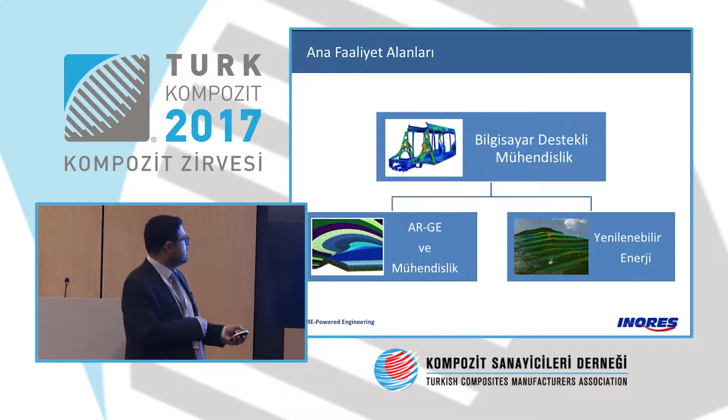As an engineering solution provider, we are providing services and solutions for our customers. When we look at them in clusters, in the very first core phase, we are giving verification services for the designs, and performance and weight optimization services is the second. And on the third side, we have information, knowledge and risk analysis, and we give consultancy services. We also have some foreign partners within this field.

And from concept to prototype, we develop products. Generally, a metal piece is redesigned with a composite approach, and we are also producing the prototype for this product. And serial production, robotic production systems, and quality equipment integration is the most experienced field that we are involved in.

Enforcing your automation systems, integrating robotic systems to increase quality. We have some integrated systems with which we provide high quality. We have some solution partners. We are not providing all of the solutions by ourselves, but we are working with the right partners. I will be speaking about our partners later on.

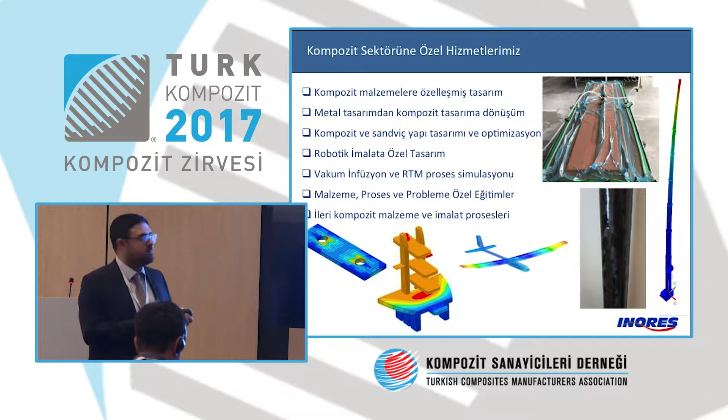When we look at composite materials, we provide a tailor-made design. Transforming a metal design into a composite sometimes does not give an advantage. Also transformation from metal to composite designs, sandwich design and optimization, and robotic manufacturing designs, because there is a specific interrelated approach within this field. When you produce a material with a normal technology, you have some limitations, and with robotic technologies, you also have some limitations. When you are doing the design, you need to do it in accordance with the capability of the device.

And vacuum infusion and RTM process simulations and training programs, and also further advanced trainings for problem solving and materials and processes. We have some advanced composite material and manufacturing processes trainings.

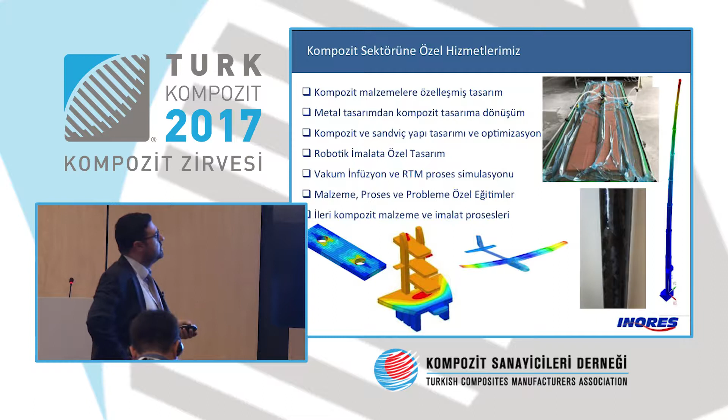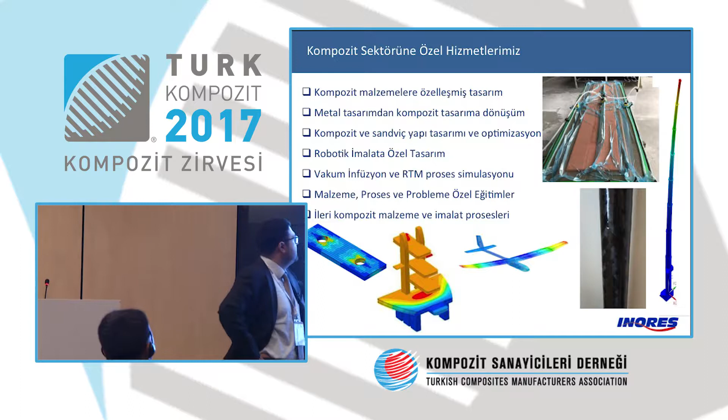You see a mast structure on the very right side and steel flooring. It is going from 1 meter to 8 meters. We have a filament line. It's a composite pipe structure, a cylindrical profile, carbon epoxy material. This is a drone material. And for thick composites, delamination simulations and analysis can be seen as some examples.

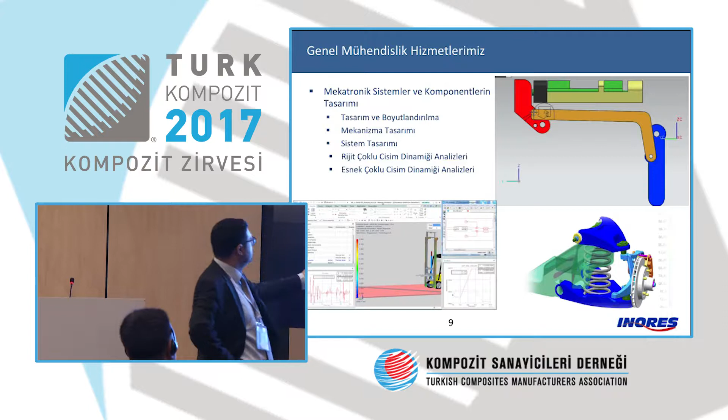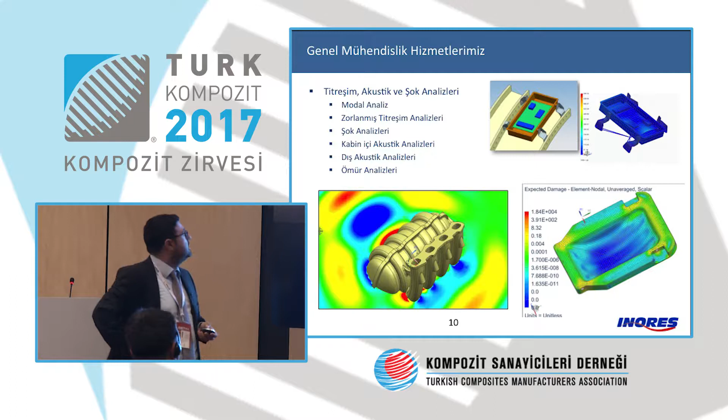Other than composite services, we are providing mechatronic systems and component designs. As you see on the right side, this is a triggering mechanism and a suspension mechanism below, and this is a mechatronic simulation. Other than those, we also have acoustic analysis for vibration. We have different software that we use for analysis, design and optimization solutions.

Of course, specifically for composites, the process to develop a tailor-made product changes from design to design. When you are designing with a metal piece, the criteria for optimization and the damage criteria are changing. So analyzing a very complex structure asks for different methodologies, different approaches. In the first step, we need to have the performance criteria. You need to cope with the performance criteria in order to decrease the weight. When you set a target, achieving that target is not that easy.

In carbon composite structures, it is possible to decrease the weight by 80%. However, in the past, in the spacecraft and automotive sectors, they could not achieve this 80%. They achieved 50%, 40% weight saving. So that is not so feasible. And sometimes you are not able to get the product that you want at the right time and the right place. The basic factor for this is matching composites and metals one-to-one.

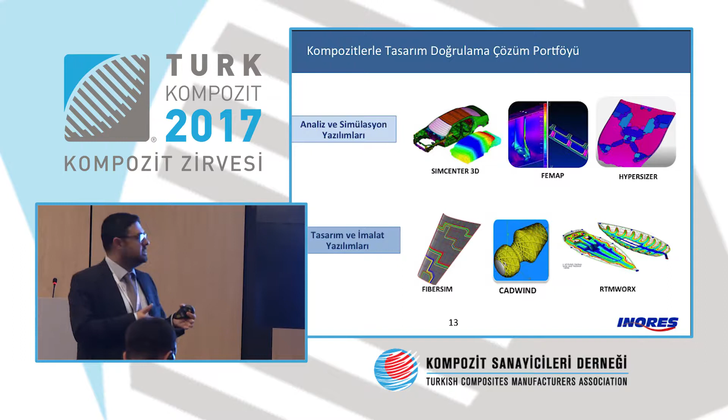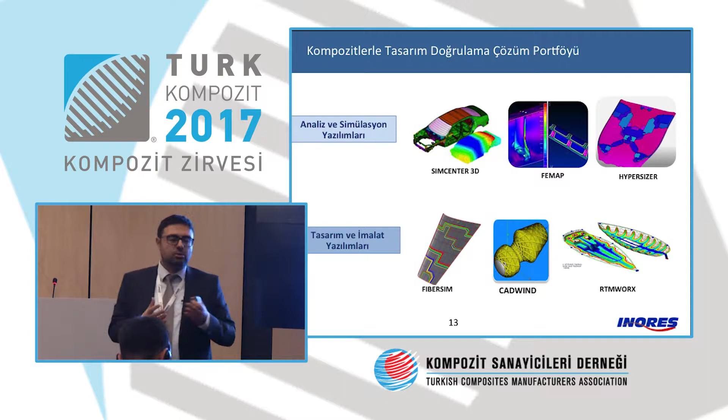For the infusion or RTM processes, resin is kept in a closed spot or covered with a vacuum pack, and when you flow it at a certain place, the resin ports or the vacuum ports and infusion ports need to be placed. Otherwise, you may have some problems. You may have some dry areas, dry zones, and you may have, for example, fluctuation and waving on the structure. So it is possible to create a design with this technology for the fluid resins.

Siemens Simcenter 3D technology is an analysis, simulation and optimization opportunity for us. You see structural, dynamic and durability, composite, acoustics, motion, flow and thermal disciplines are being examined. Multiphysics is the interdisciplinary approach which it is providing you. Thermomechanical analysis can be an example for this.

With the thermal impact, you are checking the deformation of the structure, and if there is a fluid structure, what is the interaction with the deformation? Since the flow geometry is changing, the quality of the flow is changing, so different disciplines can be analyzed by making use of this technology.

There is a composite mixed material that we use in the automotive industry. The automotive industry is really working very hard on composites. In the development phase of the composites, and when we look at the manufacturing process, there is a huge difference.

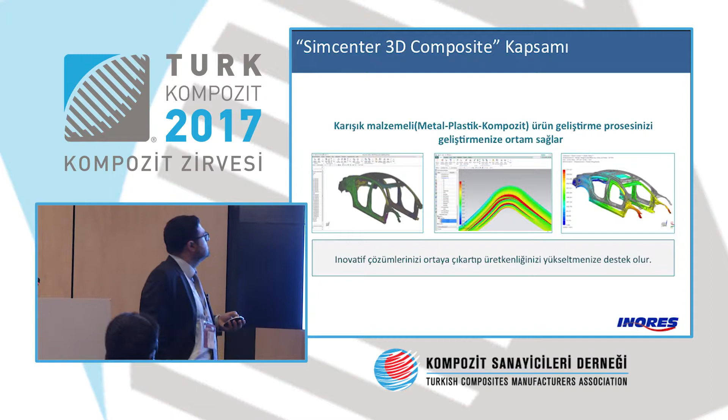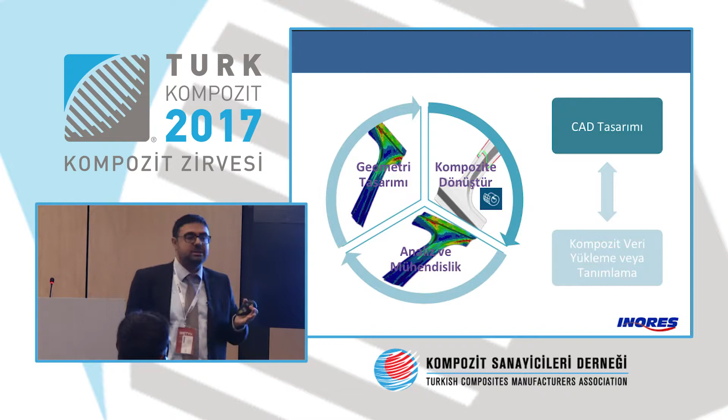Siemens is not only looking at this issue from the composite side, it is also looking at it in a more comprehensive way and looking at the mixed material designs. CAD design is starting from the geometrical design and then transforming it to the composite design. The present CAD designs, in the past, were only working for geometrical design and also on the engineering side, but now they are producing the interfaces, and they do have composite-specific FiberSIM type of software.

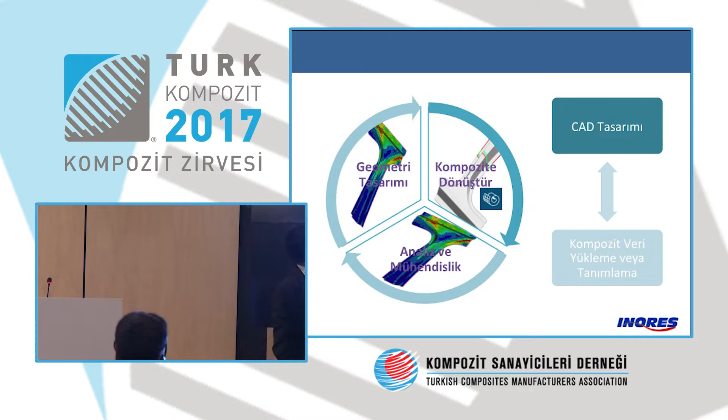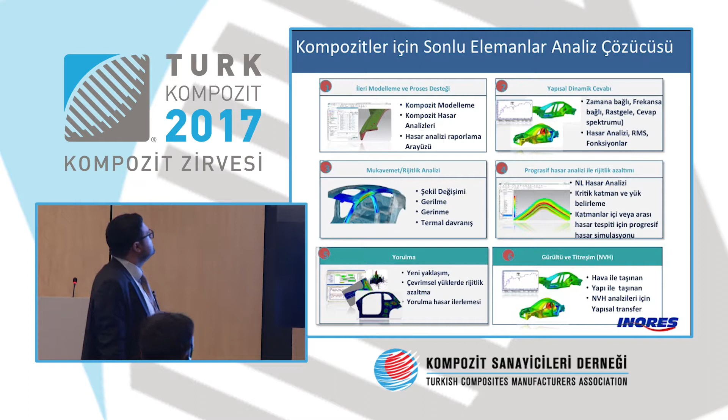It's a cycle, actually. After doing the composite design, you need to do the analytics of this, you need to have the engineering studies, and you need to optimize this design. So it's a cycle which needs to be revolved. And when we look at the analysis of the finite elements, we do have some solutions. The modeling of the composites and their coiling process for the finite element analysis is very crucial.

According to the geometry of the fabric, the orientation is changing, as you all know very well. Composites do have a strength according to, of course, the placement of the fabric. When we look at, for example, linear tensile strength, with the right orientation it is possible to bring more strength and more resistance.

And when we are calculating the orientation, the manufacturing orientation will be different. So during the manufacturing you need to analyze it, and after that, during the using time, you need to analyze it. And when we look at the analyzing situation, you're looking at the structural analysis, and also durability strength analysis, and also vibro analysis, and RMS functions can also be taken as a result of these analyses. In the aviation industry, there is a progressive damage analysis.

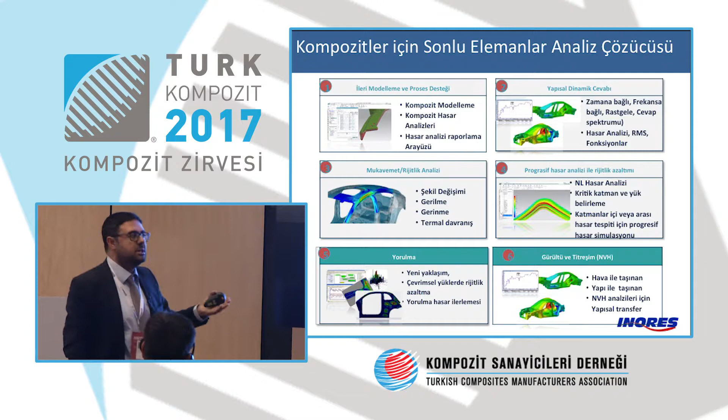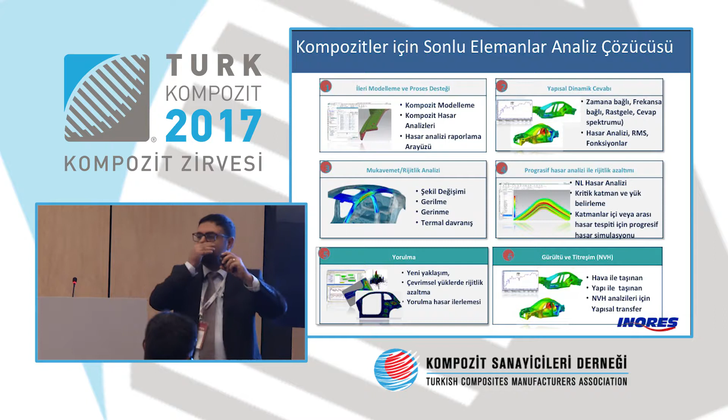And for the composites, you do have some analyses for fatigue range, and Siemens does have some studies about the fatigue range. For the layered composites, with small strikes, with small beads, you can have some cracks inside it. And when the structure is operating, it is causing delamination.

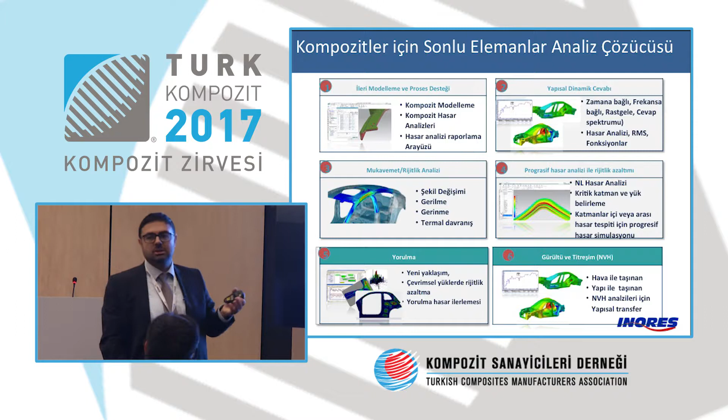Another important topic in the automotive industry is noise and vibration. In the automotive business, on the metal structure, by making use of extra materials, it is possible to decrease the impact of noise. But composite structures do have some additives, and when you create some layers within the structure, without adding any isolation material, it is possible to decrease the level of vibration. And it is bringing you a better advantage when you compare it with metal structures, and it is more cost-effective.

I have spoken about FEMAP. For the finite elements, it is a modern modeling interface, and it's a very cost-effective solution. Different complex or simple structures are being analyzed, and composite-specific types of results are being taken from this interface.

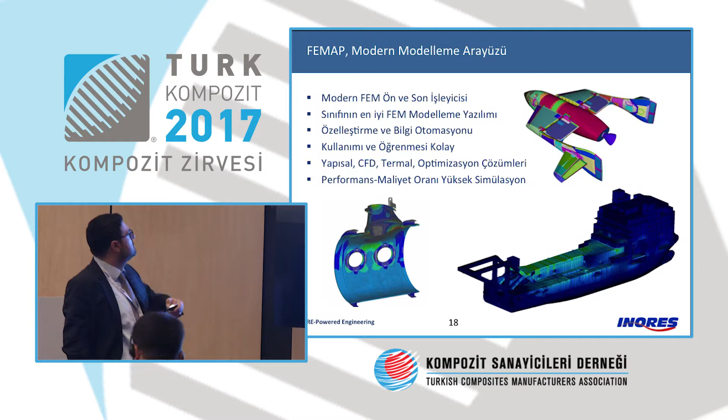The ply module, for example, is observing the orientation changes during the operation, and for the sandwich structures, there are some stability calculations, and it is possible to check whether there is any damage or not. So it's a very cost-effective solution also.

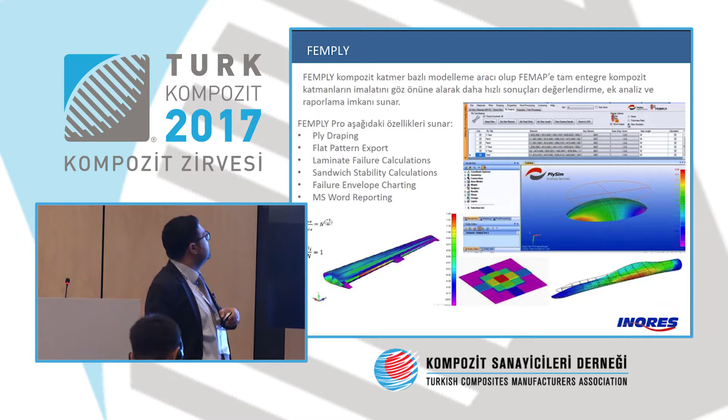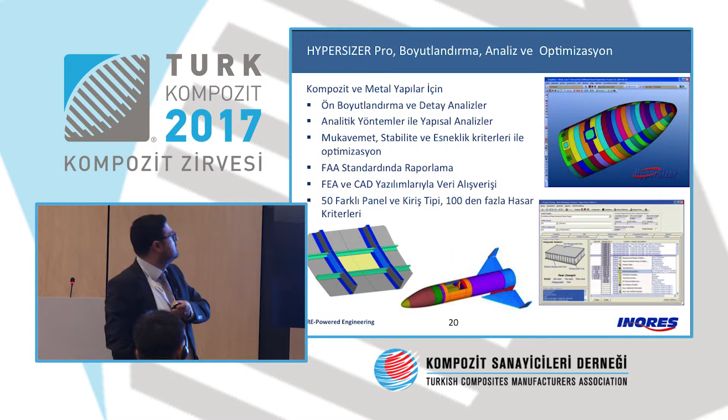HyperSizer software was developed by NASA in the 1990s, and it was spun off from NASA, and they developed this software later on. For complex spacecraft and rockets and also wind turbines, it is taking pieces and, panel by panel, it is resizing your structure, and with more than 100 analyses, it is possible to carry out a damage report. In the past there were some industrial studies, and when you compare it with conventional methodologies, it brings you a better weight advantage.

When the structures are becoming complex, buckling is becoming very critical. Buckling is a type of damage which occurs. If the material is capable of carrying the weight, and a stress occurs below that, you're having a buckling stress, and you are having a type of collapse.

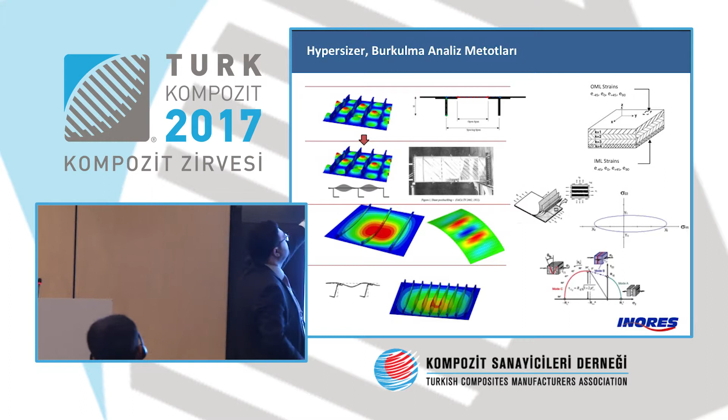And post-buckling is another behavior which occurs in aviation-based structures. Maybe you can see it in the planes. The outside layer is a very thin aluminum, and it is causing some post-buckling effect. Post-buckling is temporary. The thin layer, as you can see, is having a temporary buckling, but the composite structures are becoming thinner, and buckling is becoming very critical for composite structures. And HyperSizer is analytically calculating that.

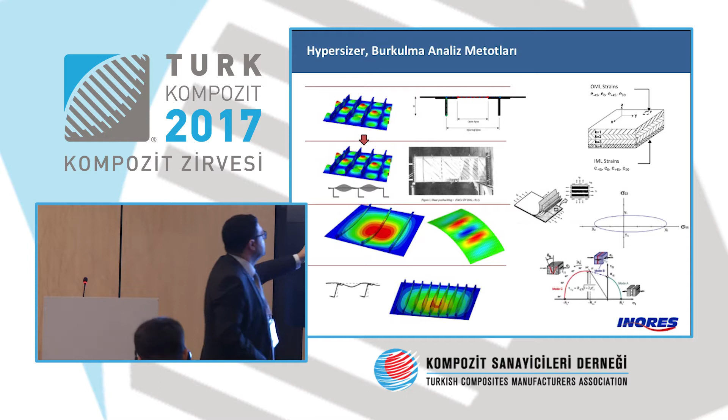And for finite element, it is possible to provide a solution for the buckling analysis. In the linear approach, buckling is observed globally, but it is not possible to analyze it locally. So you need to create another layer to observe the local behaviors, and you can get the local behaviors with the help of this software.

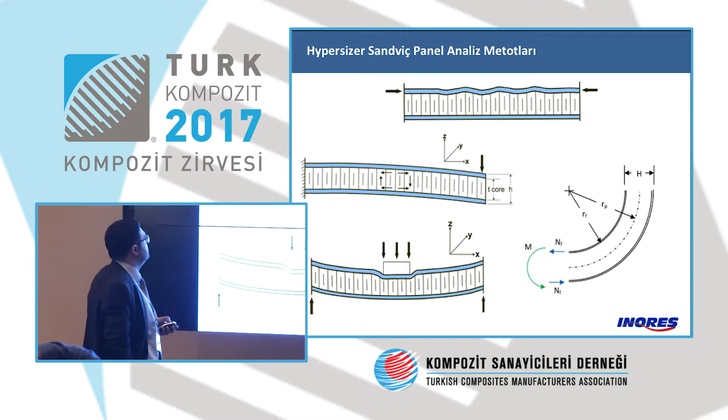And the sandwich has the same difference. I mean, on the lateral side, the surface can sometimes have damage, can have wrinkling, and the sandwich structure and honeycomb geometry is changing, and it is causing some outcomes, and HyperSizer is calculating them. It is giving you the core thickness, and it is also bringing you the ideal size for the ideal conditions.

And when you manufacture the pieces, you need to integrate them. It is possible to connect them in two ways. One of them is bonding them with adhesive, and the other way is using bolts and screws. And in a composite structure, it is not very easy to place holes. HyperSizer has a special methodology, and the stress around the hole can be calculated, and you can design in accordance with that tensile strength. Especially at the corners, you can have a lot of stress, and you can have delamination. By calculating that, you can redesign your design.

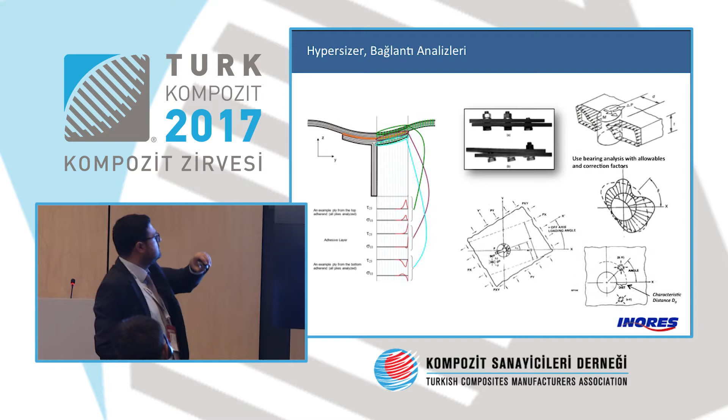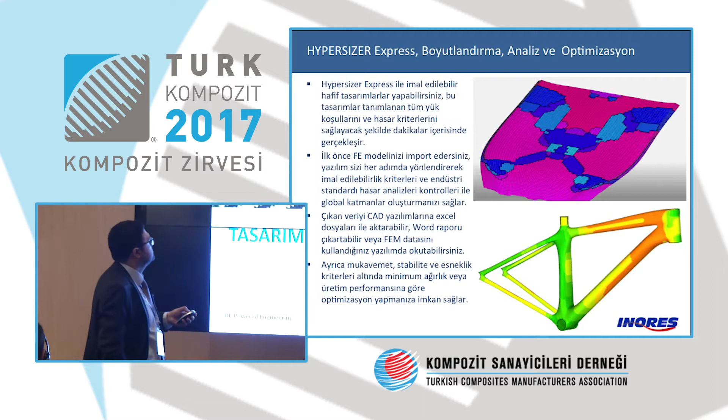We have so far spoken about the simulation and optimization software, and we also have a design issue, and we have FiberSim, which has been developed by composite manufacturers in collaboration with academia, and they have analyzed the behaviors of the composites. The structure that you see here can be familiar for automotive industry people. There are very complex geometrical structures.

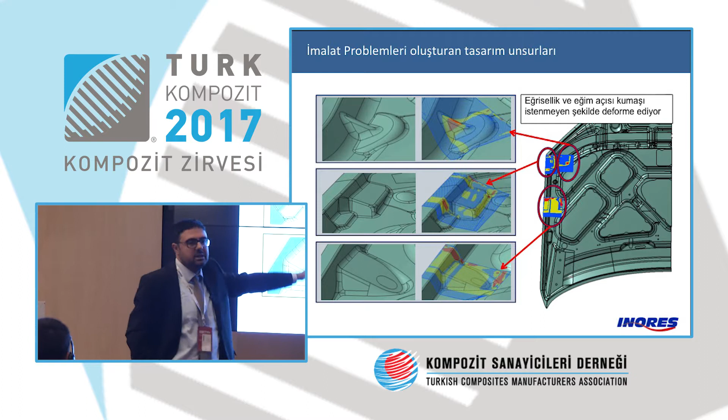For example, when you're doing pressed steel design, with 20-30 years of experience, it is possible to achieve this. But for composite structures, when you place the fabric on the mold, the red zones are facing a microbuckling or wrinkling problem. So it becomes problematic when you place the fabric, causing natural damage. If you are not careful when you place it layer by layer, in the first layer you have no problem. It is very related to the orientation and the material. In the second layer, when buckling occurs, it automatically comes to you as a manufacturing failure. And when the piece is tested, it tells you there is a failure.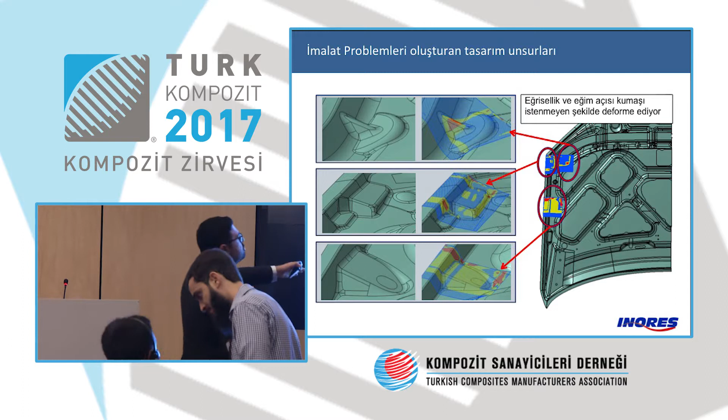So it is causing a problem. But with the FiberSim design, it is possible to have a simulation, and you're seeing the problems within your structure and you're making the changes in accordance with that simulation.

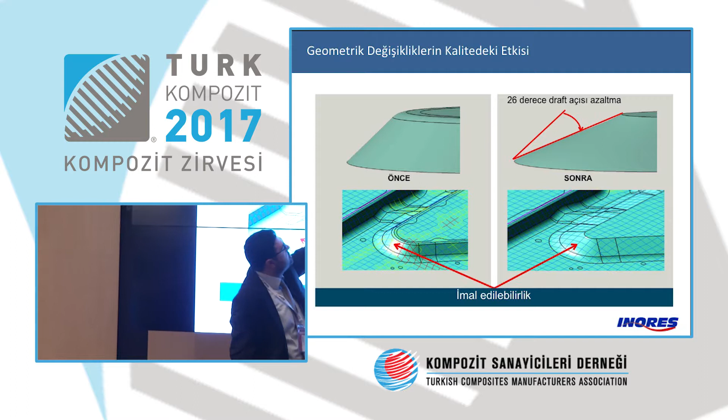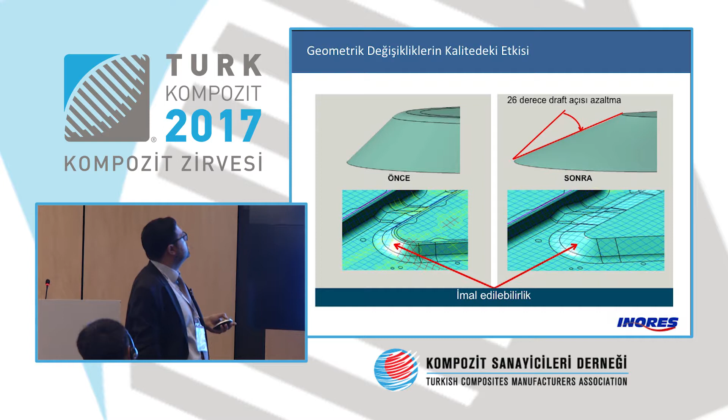Let me give you an example. You see here, there is a bead here, and when you place the fabric on that, it is causing a wrinkling, a buckling, or sometimes it is not passing here, and it is only going like a flat line. When you decrease that 26 degrees, here you are doing the right design and you're doing the right mold design, and you're avoiding damage. You're doing a damage-free, failure-free design.

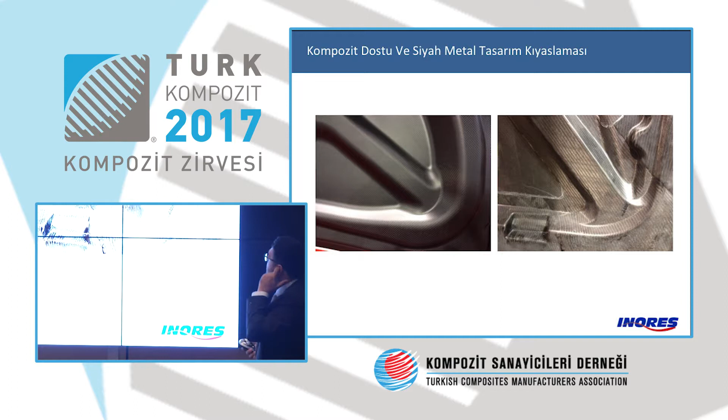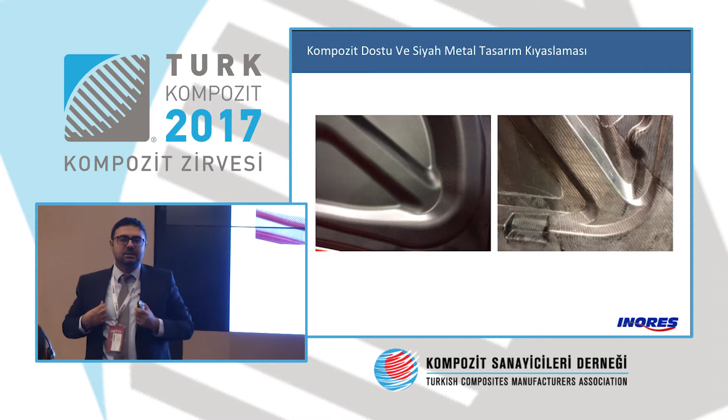Let me give you another example. When you transform a metal structure into a composite structure, it is causing such kind of corners, sometimes not forming according to your design. When we transform it into a composite-friendly design, when you have curvy structures, it is taking form much better in the composite structures and bringing you a better result.

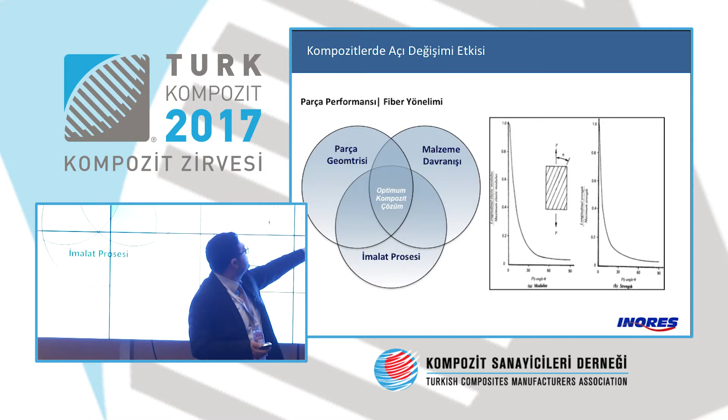In composites, change of the orientation angle really causes a great difference. Carbon composites, maybe 2000 megapascal, and high strength 6000 megapascal strength can be provided. However, when you shift it 5 degrees, for example, it is causing a 40%, 50% strength loss. So the right orientation needs to be designed, and also manufacturing in accordance with that design is very crucial here.

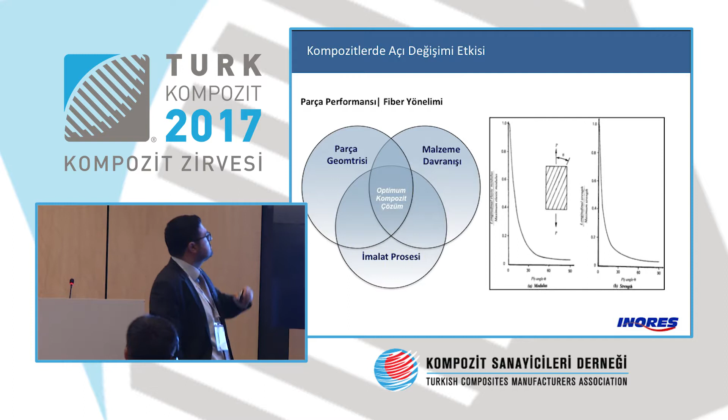FiberSim software, as we see from the graphic, is providing you a process simulation. For example, for the dry fibers or any prepreg, you can create the essential thickness. For the internal design, this is very crucial. When you change the thickness of the composite, if you do have another additional supportive internal structure or device, you need to recalculate it.

And it is possible to calculate the weight also. It is possible to calculate the costs, and it is possible to have the manufacturing design and drawings. If there is an RTM structure or an infusion structure, it is possible to transfer the data to the software. Why is this important? Because if we have a fluid resin and we inject it into that system, one of the parameters is the permeability. And this permeability changes a lot according to the fabric that you use.

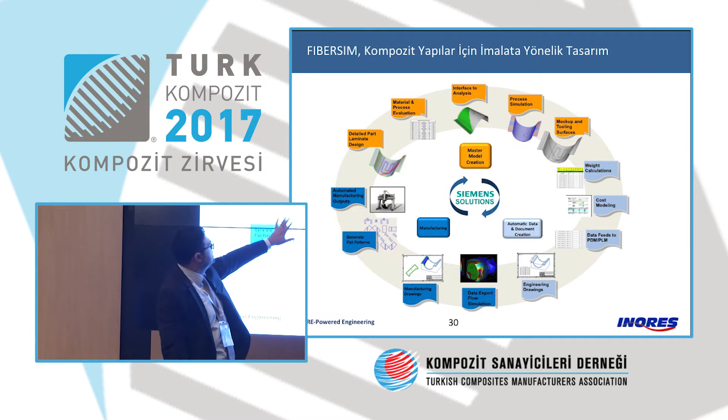If you do not transfer it in the right orientation, the outcome can be a failure. For this reason, right orientation and transfer of the right thicknesses is an advantage provided by the software. And it is also possible to see the flat placement of this fabric. And there is ply cut. If you are using ply cut devices, you can make use of this and place them accordingly, and you're having less loss from the fabric, and you can cut it in the ideal form.

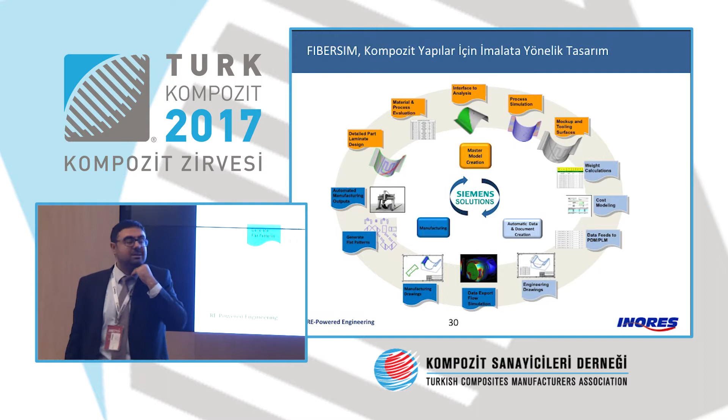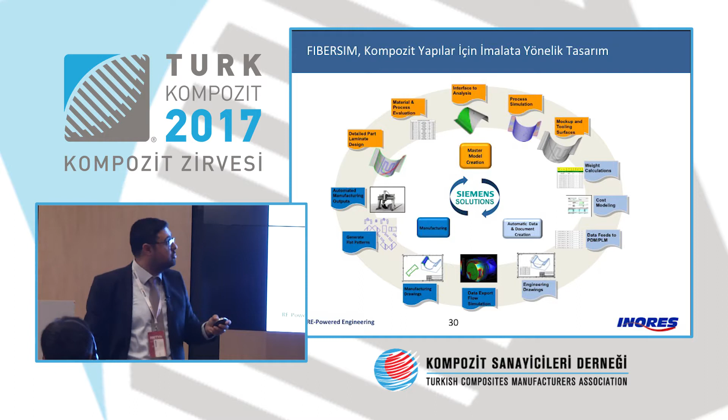And fiber placement: when you make use of robots for fiber placement, it is providing an opportunity to design according to that robotic technology. And it is also passing the data to the analysis, and you're getting analysis reports, and it is possible to create composite manufacturing data. The main objective here is a comprehensive, integrated design of analysis, design and manufacturing. And it is bringing you the necessary specs and enabling you to design the ideal form.

Actually, last but not least, we do not have any simple problems in engineering. Everything is very complex. Geometries are very complex, materials are very complex. It is not possible to carry on any operation alone. A lawyer can work alone. A doctor may work alone, but engineers cannot work alone. There are different disciplines. We have electronic software technologies, and also some spatial active sensors. So mechanical engineer, electronics engineer, different disciplines, a multidisciplinary approach is essential within this field.

For this reason, you need to know what you're designing. And you are making use of simulation tools in the automotive industry. They have come to that level. We have the digital twin. You have the twin of your vehicle. There is no material or piece which is placed without simulating. The durability of the vehicle is being updated from that simulated twin.

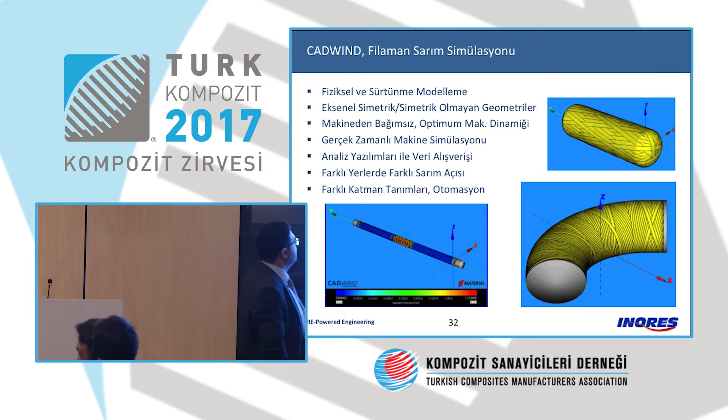And there are different techniques here. For the tank-like structures, the fiber that you make use of should not be slipped. So you're going from the long road, and you need to find a way. And the software is automatically calculating that and implementing that. If you need an extra thickness at a certain place, it is possible to arrange it with a code. And this data is being transferred to the analysis. RTM-Worx is being used for the vacuum infusion and manufacturing simulation.

You see the filling of resin. You see the distribution on the body of the boat. You see a wing example. Maybe it's not that clear, but there is a white zone here. This is the dry zone. In the RTM processes, the carbon composite structures, which are very expensive, are closed structures. If you do anything wrong in the infusion phase, you'll see there are some dry areas. You need to make some additional application.

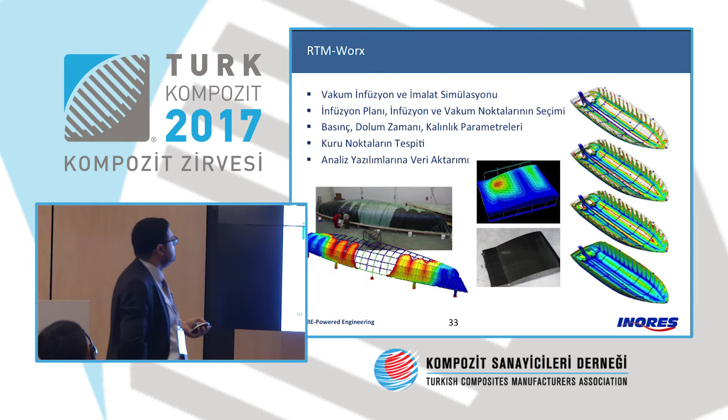During the infusion, since there is a vacuum bag on it, it is possible to see it, and you're following and interfering in the situation, or you're isolating that zone and adding additional resin to that place. But the RTM process is a closed process and you're not able to see the inside.

About manufacturing and quality systems, as I have told you, we have developed our own composite winding system. We are providing it to our customers. We do have a prototype and we do have a machine. We are working with a French company for the robotic fiber placement. Composite manufacturing is a very crucial process. It's a very heavy and busy process. So it's taking a lot of time and a lot of labor work.

And these automatic laying devices take the fiber from the bobbin, place it and cut it, and robotically provide you the manufacturing opportunity. It can be a dry fiber, or it can be a prepreg material. If it is a prepreg material, it goes to the autoclave phase; if it is a dry fabric, it is placed for RTM. In the aviation industry, they use it very frequently.

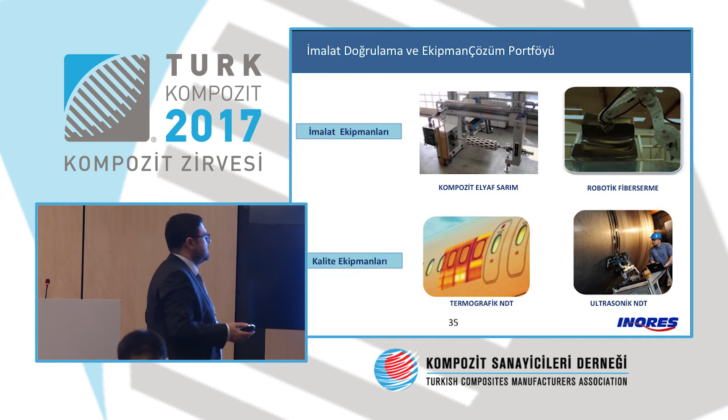The automotive business, as I have told you, has more complex structures. The approach in the automotive industry is placing it on a flat place and forming it. So with a chemical binder, it is possible to achieve this. About the quality equipment, about active thermography, we are providing some cost-effective systems.

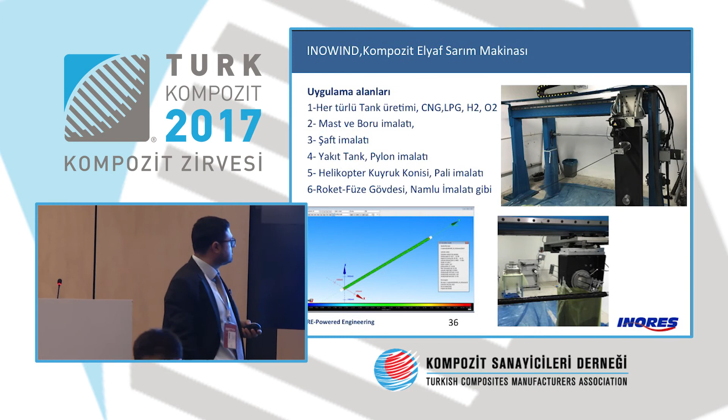We developed a filament winding machine. We do have INOWIND. We do have a carbon composite piece which we have used. Why have we done this? Because for the moving parts, we would like to consume less energy, and we would like to make the process faster. We have used a sandwich design, and it has brought us a lighter weight in design.

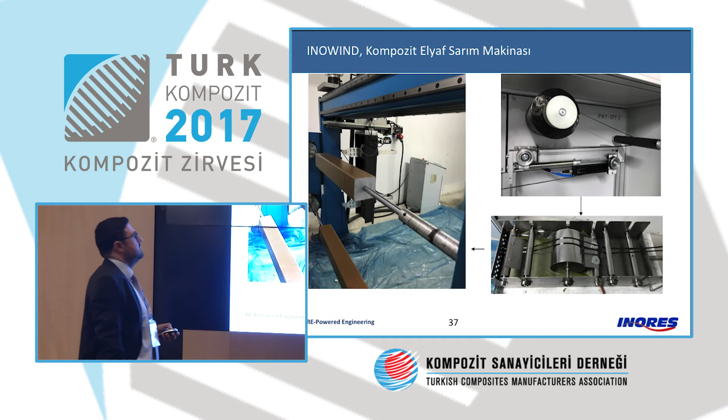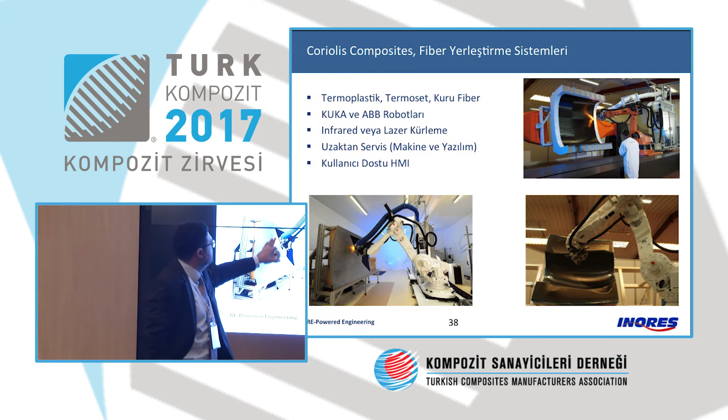It is possible to do the winding in different ways. There's a pneumatic feeding and control also. There's a plastic control, an engine system, and a resin bath system. We have spoken about the robotic technology. As you can see here, it is taking the fabric from the board in the prepreg materials. This resin is a very fluid material, and you're melting it and sticking it on the mold with the help of this technology.

We do have an active thermography system, for which we are making use of a German technology. It can be a halogen lamp, it can be a flash lamp, and with the heat of these lamps, you are finding out whether there's a failure on the structure or not. On the back side, the supporting sides may have some damage, for example. You're seeing the cracks, you're seeing whether there are any loose parts, for example the rivets or fasteners.

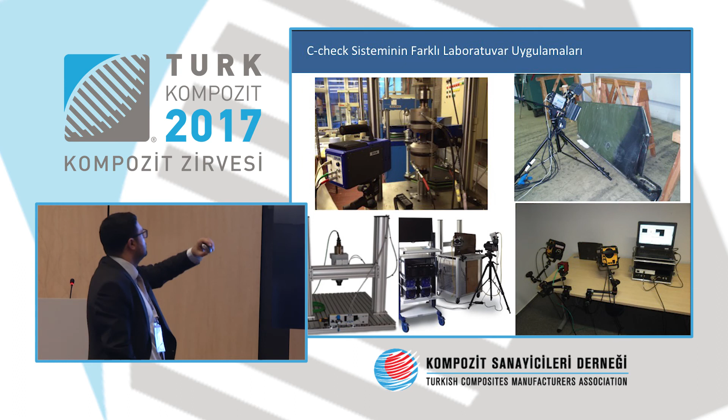This is a mobile system with vacuum legs. It is sticking on the structure. With the thermal cameras, it is checking the damage and failure. There is a metal piece remaining here. It is not possible to see it with the naked eye, but with active thermography it is possible to see this. And you can also use them integrated into manufacturing lines. With the thermal camera, you see the distribution of stress on the structure in military applications and laboratory applications. It is possible to use this.

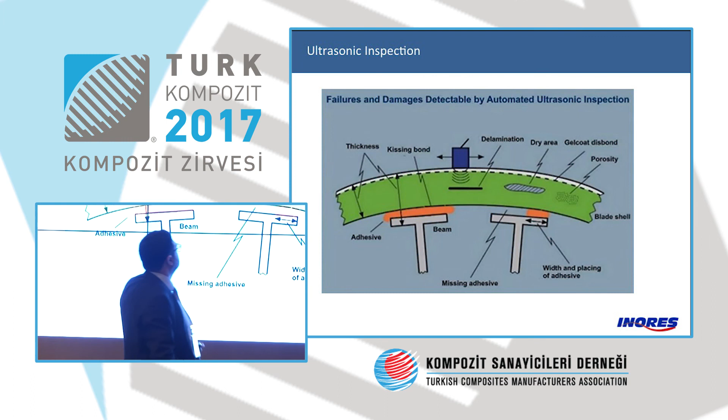Another technology is the P-scan technology. It is working with ultrasonic waves. You can see it in our booth if you would like. We can show you a demo. Failures and damage can be detected by automated ultrasonic inspection. If there's a problem with adhesive, or a delamination problem, or a gel coat disbond, or porosity, or a change in thickness, it is possible to see that. Porosity type and other problems can also be observed.

Design, verification, manufacturing, and quality are the solutions that we provide. Problem-specific, right solutions is our motto. So we want to respond to technical demands with the right quality and cost-effective solutions.